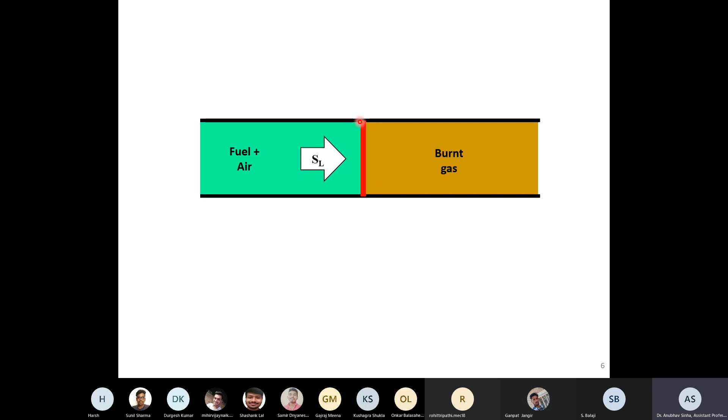What about heat? We are talking about heat in combustion, right? So the tube walls will cause heat loss to the surroundings. Heat is lost through these walls. Will it have any impact on the flame? Based on what you have studied, try to remember premixed Mallard and Le Chatelier or any simplified theory. What will heat loss do? Will heat loss promote the flame or will it try to extinguish the flame? Is heat loss good for the flame or bad? It will extinguish or slow down the flame. It's bad for the flame, sir. It is bad for the flame.

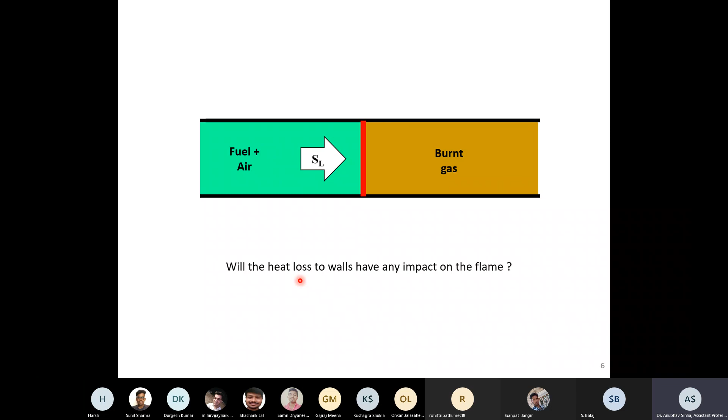So we studied Mallard theory. We said that heat conduction is responsible for continuing the flame. These slides you have already seen, I'm just repeating these two slides. So in premixed flame, when we talked about Mallard and Le Chatelier's theory, we said that propagation of heat is the controlling mechanism. So heat loss is very important for the flame, it could extinguish the flame.

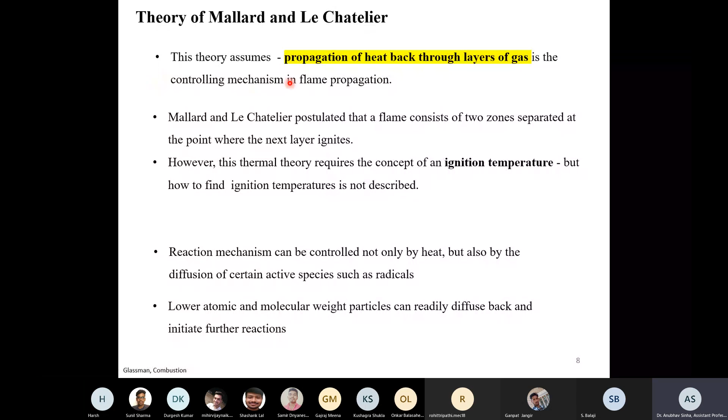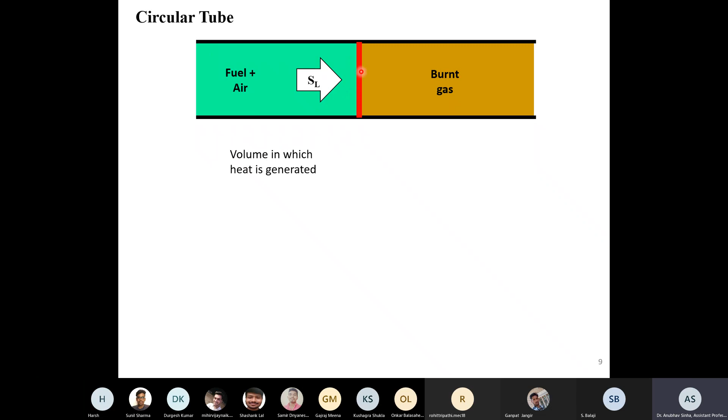So let us say we have a circular tube. Now, what is the volume in which heat is generated? This is the volume, right? We have a flame thickness delta and the area of this tube, the cross section area. Let us say that is pi r square. Pi r square into flame thickness, this is the volume. Everyone agrees? Yes sir, this is the volume in which heat is generated.

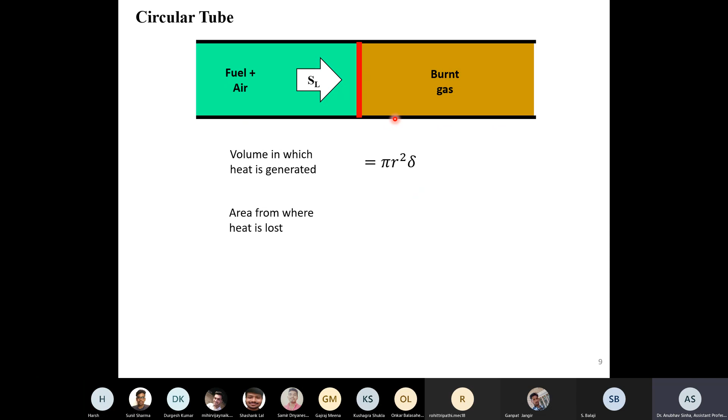Now I will talk about the area where I am losing heat, that is the circumferential area, that is your 2 pi r, where r is the radius of the tube. 2 pi r into delta, flame thickness. So this area, basically taken around the circumference, is called the area where we are losing heat.

So if I take a ratio of this for a flame, I am interested in what is the relative importance, the relative strength of heat generation and heat loss. Heat is generated within this volume and heat is lost from this area, so let us take a ratio of volume and area. This should give us some length scale. So this is just these two numbers, I take a ratio, and it turns out to be r by 2, or basically it is dependent on diameter. So we can say that quenching of flame will roughly depend on tube diameter or tube radius. Everyone agrees to that? Yes, sir.

Okay, so basically how do we measure the flashback? We use a premixed flame with a Bunsen type burner. Now suddenly I stop the fuel flow, so what will happen? The flame will go inside the tube. This is called flashback, we have already discussed this, right? So if the flame propagates back to the fuel supply source, then it is called flashback.

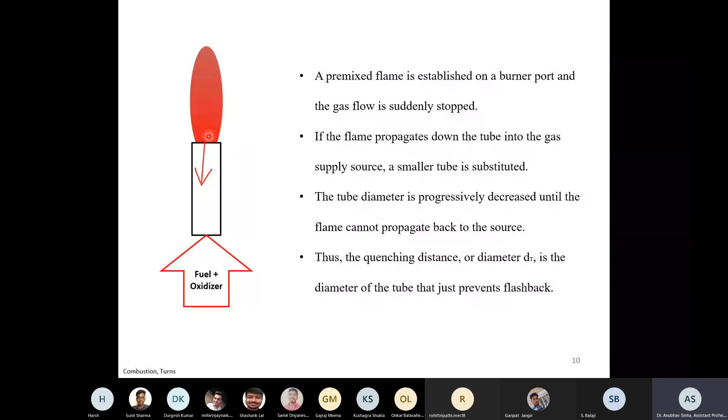Wait for a few slides, ignition will come later. Right now I'm talking about quenching. Let us say we have a Bunsen burner and we keep reducing the diameter. At one point we get a diameter where the flame is not propagating back; the flame is getting quenched. That is the critical diameter I am talking about. Why does the flame get quenched? Because whatever heat is generated is lost to conduction. That is the critical, limiting case we are discussing.

In general, what you said is right. If you have a steady case, heat generated will be more than heat lost. This is true for a normal, steady, stable flame. But I'm talking about a critical condition where the flame just gets extinguished, at the quenching diameter. So why does quenching happen? Because heat generated becomes equal to heat lost.

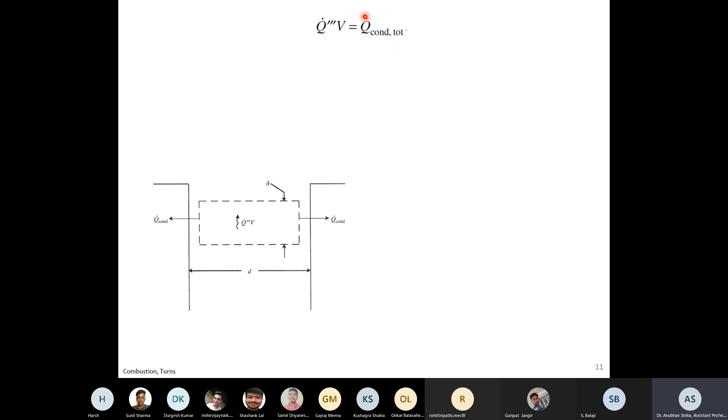Fine. So let us say both are equal, and look at the terms. Volumetric heat release is equal to m dot f, the mass flow rate of fuel, into heat of combustion, which is the heat generated by burning a unit amount of that fuel. This gives the total heat produced by the flame.

Now what about conduction? Conduction can be calculated using Fourier's law: minus K, A, dT by dx. Whatever dT by dx we have at the wall gives us the net heat transfer. The flame is at a higher temperature, the wall is at a lower temperature, so the flame loses heat. Let us talk about this dT by dx.

One simple assumption could be that Tb is the burnt gas temperature and Tw is the wall temperature. Let us say this is Tb and this is Tw. One simple assumption is that temperature varies linearly from the center of the tube to the wall. Then I can write dT by dx in this form. Is it clear?

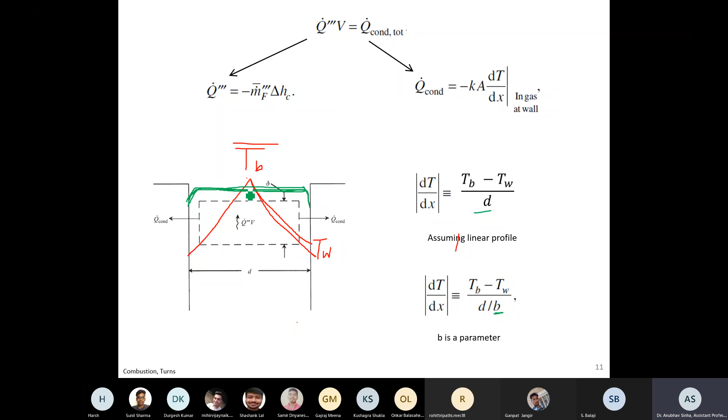So what we do is take the same equation and introduce a parameter b. By adjusting b, we can make sure we follow this actual profile. That is the use of b — you can change b to get the correct profile. What you see in green is the correct profile for the temperature distribution in a flame.

Is this clear to everyone? Yes, sir. Fine.

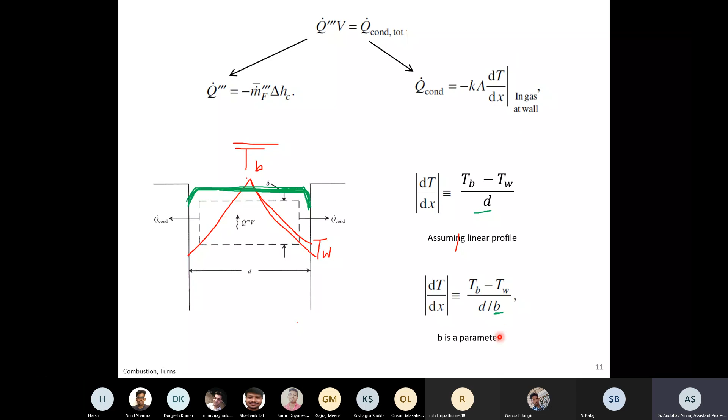Okay, moving on. So this is the equation we are dealing with. Now we derived dt by dx using a parameter b. So what we'll do now is equate these two equations. We'll say that m dot f into hc, which is here, this is Q. What about volume?

Volume is delta, the flame thickness. This is delta, thickness of this flame. D is the diameter, don't think that this is differential. D is the diameter of this tube. Let us say we have two walls, two infinite walls at a distance d, separated by a distance d. So d is that, and let us say these walls are into the paper for L thickness. Understand? So it is a 2D wall sort of thing.

Let me draw it for you. So it is like this, a 2D wall. This is L, both the walls are going into the paper like this. This distance is L, and then this is delta, and the distance between them is D. Is this clear to everyone?

This is for a rectangular flame profile, sir, the cross section of it. Yes, I'm talking about two parallel plates. A flame is there between two parallel plates, that's all. Instead of a circular tube it's a little complicated, so let us take a parallel plate.

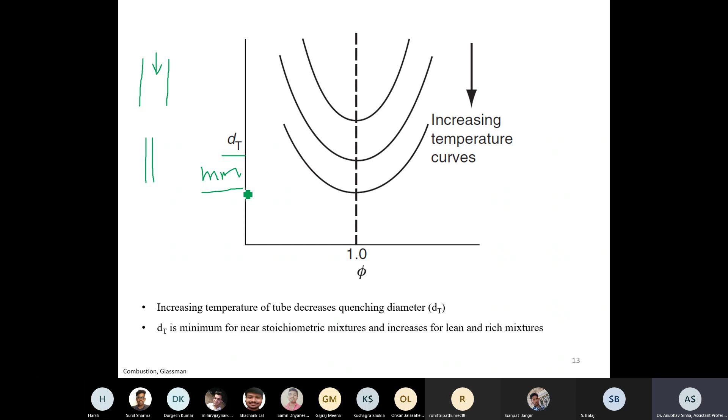Now the question arises about the industrial devices we use. Let me get a pointer. So dt is like 5 or 10 millimeters or something, but for various industrial applications, the tube diameter is much larger than dt. Industrial applications use tubes of several centimeters, 5-inch, 10-inch, 2-inch, definitely more than dt.

There could be many applications where flame is present in part of the tube and you don't want the flame to go to the other part. Look at this figure: here we have flame, but I don't want it to go here. This is much more than dt, but we still don't want the flame to pass. So what can be done to prevent flashback? Anyone would like to guess?

Sir, force, or change the material in that area, or provide cooling to stop it. Cooling could be one method, but it won't be very effective if the tube diameter is so large. Anyone else? You are close, but not correct.

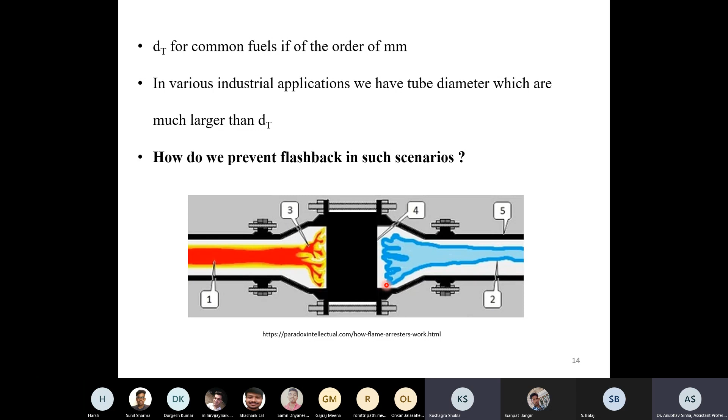Yes sir, I was thinking of that, but I said force. So yes, then you should tell that. So this is called flame arrestor.

Okay, so let's see the labels. This is the exposed side, flame is there. This is the area where we don't want flame to go, shown in blue. So this is called flame arrestor. It looks like this, from an industrial application.

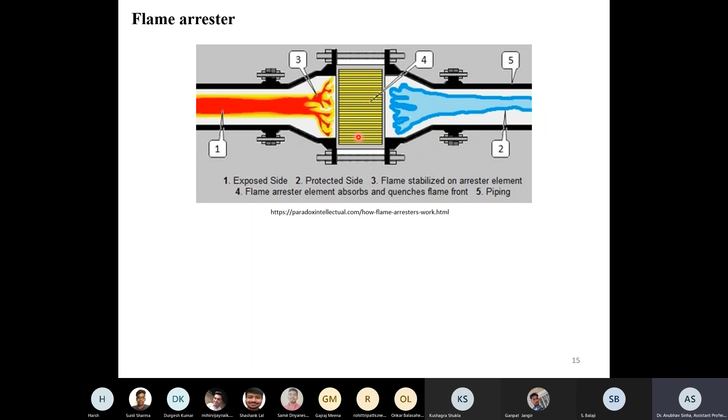What we do is provide a very large surface area. We can have smaller tubes, or mesh, wired meshes like this. These are very small, and the basic idea is that flame is in contact with all these pores or holes, and the flame will start losing heat. The more surface area in contact with flame, the more heat it will lose. That is what we have seen.

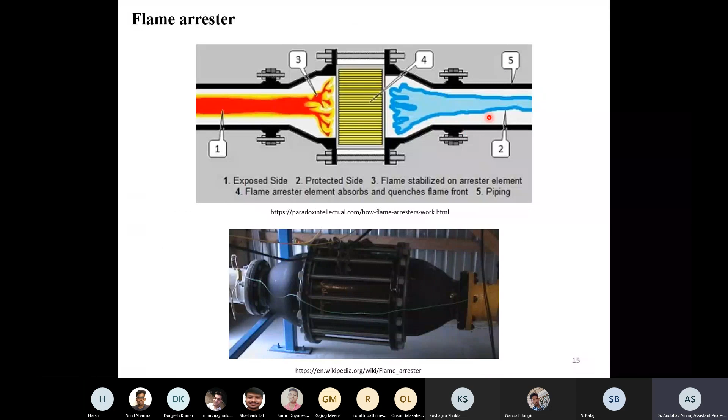So if you go to the derivation, this is Ka. If I increase the A to very large values, then I can extinguish the flame. That is the idea - I am trying to increase this area where heat is getting lost. That is the idea behind flame arresters. Smaller tubes or mesh can be used, and we are trying to increase heat loss by increasing surface area of metal in contact with flame. Metal will anyway carry out the heat.

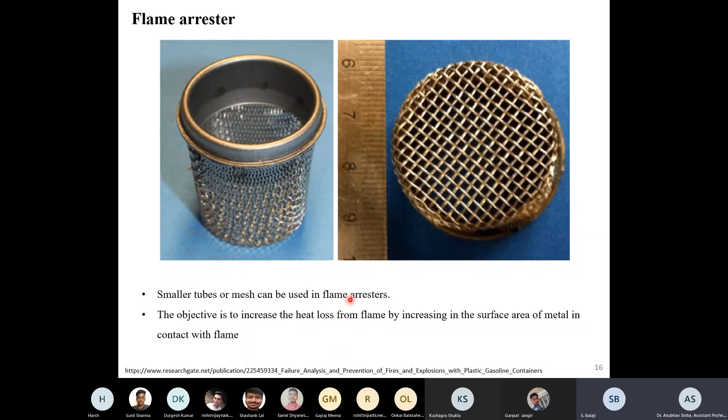Is this clear to everyone? Yes sir, yes sir. Any question on this? No, okay. So let us talk about Davy's lamp.

Many decades ago, Davy invented one lamp. That was very useful to be used in mines. Now the problem in mines is that you have gas leakage a lot of times. So you are going with a lamp, and outside there is methane or some other gas.

It could catch fire, so how to prevent that? Anyone want to guess here, looking at this figure, how the flame inside will not go outside? Sir, that meshed surface will act as a flame arrestor, not letting the flame out.

Correct, so it will extinguish the flame. It will not allow it to go out. So that is a very important discovery, especially for the mining industry. Because of that, they could have safety. This is called Davy's safety lamp.

So if you have any normal lamp, it will have flame outside. Understand this - outside you have combustible gases, everywhere there are gases which can burn. So you don't want those gases to burn. So you have a flame arrestor surrounding the flame, so outside gases are not getting burned. That's all, this is Davy's lamp.

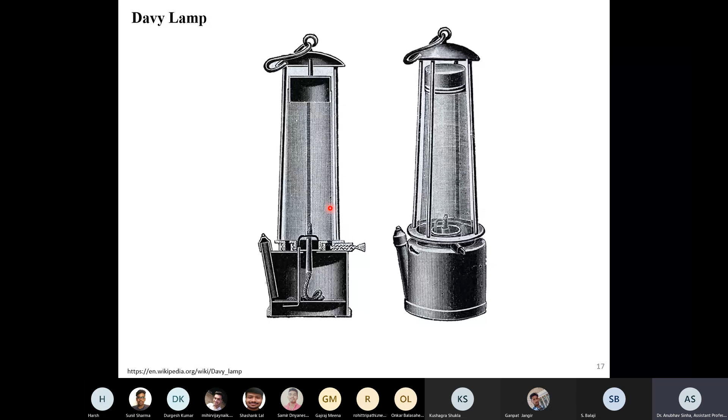Now let us talk about ignition. I don't know how much time is left, let me check. Okay, we have 15 minutes now.

So ignition, you know what is ignition, right? Let us talk a little bit technical about ignition. So have you taken the IC engine course, or is it next time for you? We haven't yet taken IC engine courses. No sir. Okay fine, but you know there are two types of engine: petrol engine and diesel engine, right? Yes sir.

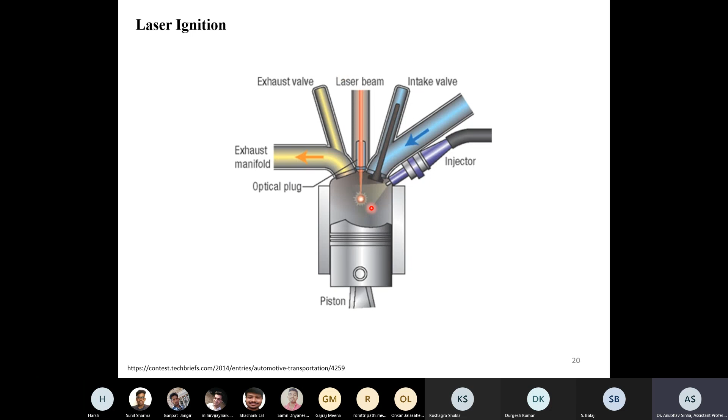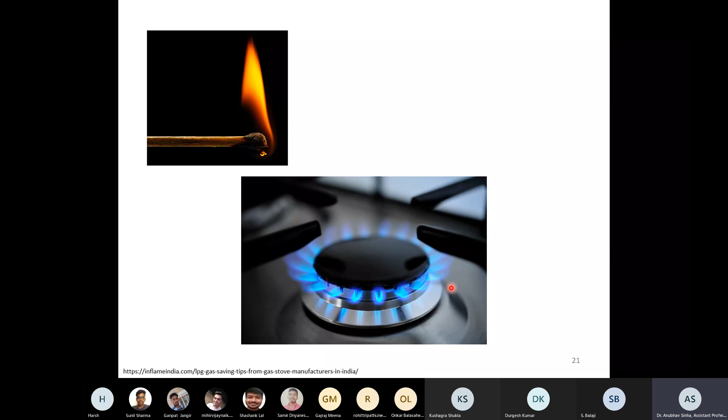So we have three methods - you can use spark, compression, or laser ignition to burn fuel inside an IC engine. Let us talk about your cooking gas in your home - how do you burn this? Using a matchstick, right? So what we see here is different mechanisms where they could ignite flame.

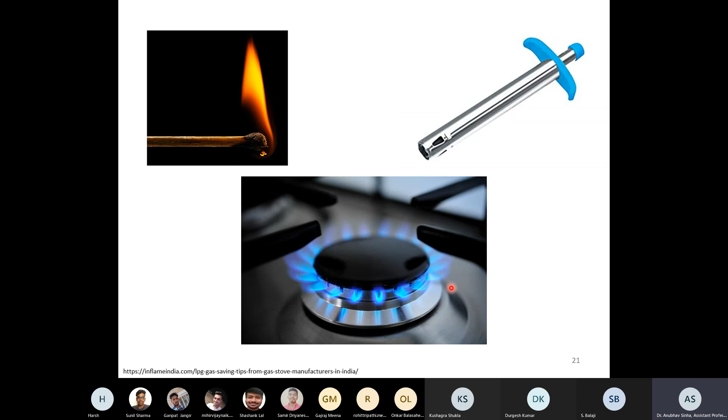What else? You can also use sunlight. Has anyone done this? If you use a convex lens with the sunlight, it can burn paper or something. Has anyone tried this? Yes sir. Okay, so this is ignition, you are igniting the paper. Similarly, early men used to rub wood or flint stones, that will give you spark which will burn your firewood.

So to summarize, we can say that there are various sources of ignition. Ignition could be auto ignition when we reach the ignition temperature, or we can also use high temperature gas jets.

Or we can have electrical spark, which is shown in the IC engine what we discussed. We can also use a matchstick, ignition by flame, or laser ignition, or rubbing of stones or wooden sticks. Adiabatic compression is also something which gives rise to auto ignition. Shock waves will give rise to auto ignition, and sunlight focused by a lens, etc. So there are various methods.

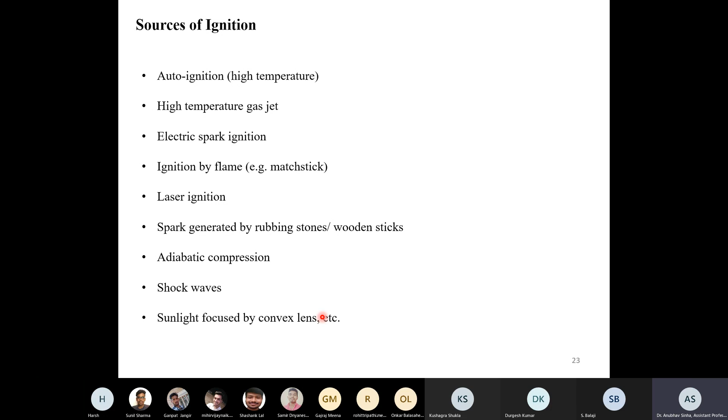Now, what is the physics? What is the basic governing mechanism which tells you whether it will ignite or not? So Williams has given some criteria.

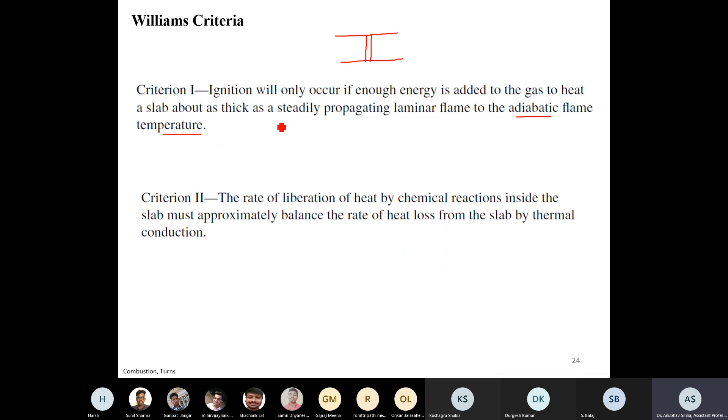Criteria 1 says that ignition will only occur if you add enough energy to the gas such that a slab as thick as laminar flame thickness is heated to adiabatic flame temperature. So let us talk about a tube: you take a slab and heat it so that it reaches adiabatic flame temperature, basically burning it. That slab should be as thick as a steadily propagating laminar flame, which means delta. The criteria is that you need to burn that fuel, so you need to reach the adiabatic flame temperature. So this is one criteria provided by Williams.

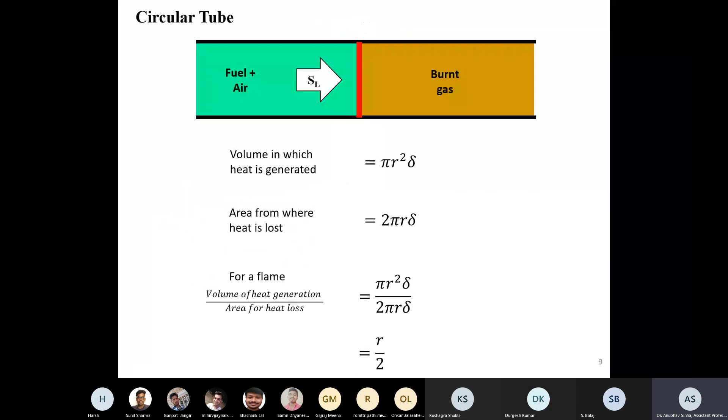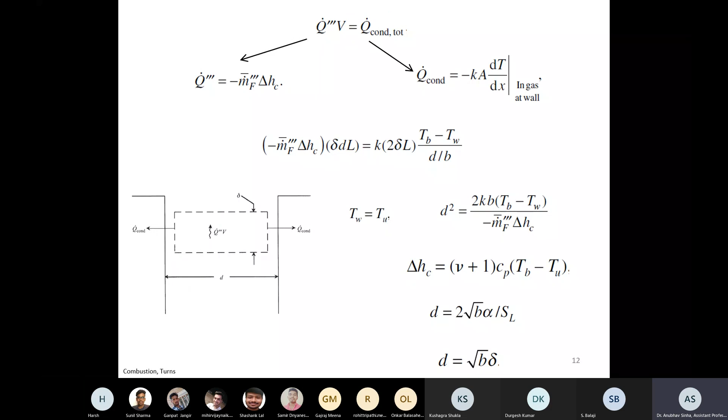He also says that rate of liberation of heat is criteria 2: rate of heat liberation or heat generation must approximately balance the rate of heat loss. That is what we discussed for quenching - heat generation and heat lost. What we have derived here in numerical form is what is stated in text form - this is Williams' second criteria. This is very important from a theoretical or historical perspective, but this is how he has defined the two criteria.

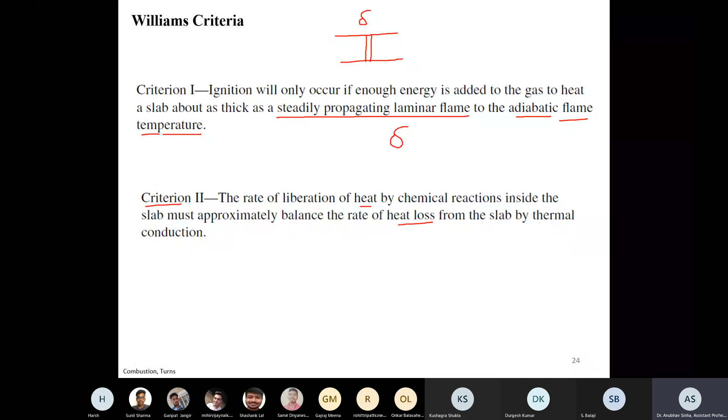So let us use and see how we can apply the same criteria for ignition. Basically we'll talk about minimum ignition energy. Let us say that you have LPG and you put a spark using your igniter. You must provide some minimum energy, right? If your energy is lower than that, then it will not ignite.

Do you understand what I am saying? If you provide very small energy, it will not burn. If you provide very large energy, it will burn. If you provide just sufficient amount of energy, it should be able to burn. That is what we will try to calculate, and that is what is called minimum ignition energy, or minimum energy required for ignition. Is this clear to everyone? Yes sir. Right, so we can give higher energy also, but what is the minimum required which will just burn that gas?

So again, we will use the same logic: whatever heat is generated is equal to heat lost. This will give you the critical condition. Beyond that, if you have higher conduction, then it will be extinguished. If you have higher heat generation, then it will be stable and it will grow.

Now, using the same logic, here we'll talk about a sphere. What is the volume of a sphere? Sphere radius R, what is the volume? 4 by 3 pi r cube, and R is R critical. So Q we can write as m dot F into Hc, as discussed previously. Now substituting the volume of a critical sphere at critical radius, equal to 4 pi r square, which is the surface area of the sphere, and dt by dr. Is this clear to everyone?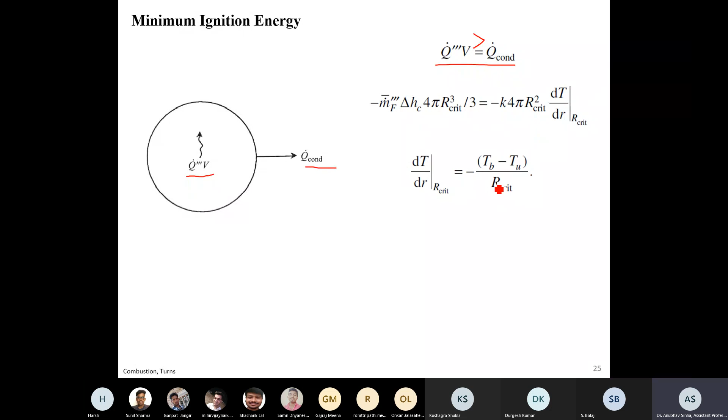Similarly, for ignition, we say that this will be more and the flame will be glowing. So just to calculate minimum or critical values, we'll equate it. Ideally, for ignition this will be more, for the fuel to get ignited, for ignition to happen. But for the limiting or critical condition, we take it equal. Based on that, we'll calculate. So similarly, we'll derive what is R critical based on this parameter. Now what we assume is that this sphere is at Tb.